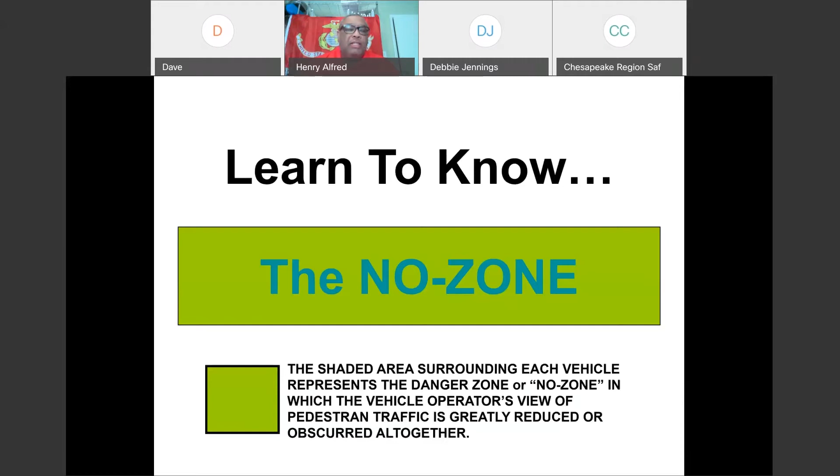Semper Fi, David. Thank you so much. First and foremost, let me just thank Dave and the quality staff that he has there at the Chesapeake Region Safety Council. I have been going there and have met many friends in class as well as the staff there. They're A1 and just can't beat it. So thank you so much for this opportunity.

Good morning, everyone. This is new. It's new for myself. I have taught many classes along with my staff, and this new way of teaching just shows you how quick we can adapt.

So to get to it, roadway work zones are hazardous for both motorists and the workers. It's a complex array of signs and barrels, and it changes for the workers as well as the traveling public every day.

I'm going to give you a few figures here. Believe it or not, pickup trucks and SUVs account for 151 worker deaths on the road as well as in construction sites. That sounds kind of strange. You'd think everybody would know what's around them, but that's not it because we get complacent. You've heard this word before because most of you are safety professionals or operators of equipment. Machinery makes up 131, automobiles 129, semi-trucks 124, and dump trucks 82.

And it's not just a construction issue, it is also a general industry warehouse issue, working in and outside of buildings. So you would think it's not so dangerous, but it very well is.

Today we're going to do something different. We always talk about knowing your safe zones, knowing your escape routes. We also talk about the equipment inside the zone. But do we talk about it from an operator's perspective? I always tell people, remember one thing, the operator is not looking for you. So you need to look out for him. You need to know where you are, and what the possibilities are.

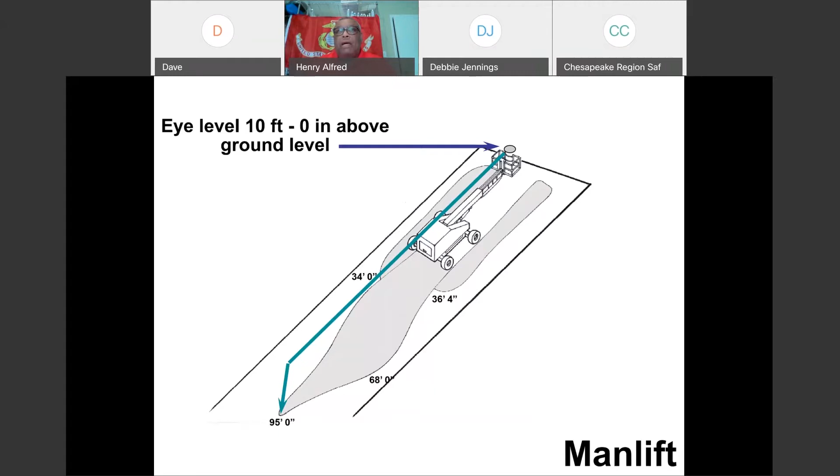If there's a wall, barrier wall, guardrail, whatever on either side of this piece of equipment, it could accidentally tilt over. They don't see you, you're in the way, something happens. I got a couple of examples that we'll go across here pretty soon.

We had an incident some years ago where a guy was in the way, had his back turned, and the operator didn't see him. When he swung around with the piece of equipment, it hit him and injured the man. So you have to be aware of the surroundings.

You can't be standing beside this piece of equipment, because you don't know what's going on with the chains. He may accidentally have a swinging piece of equipment that actually moves, and you get trapped under the wheels or whatnot.

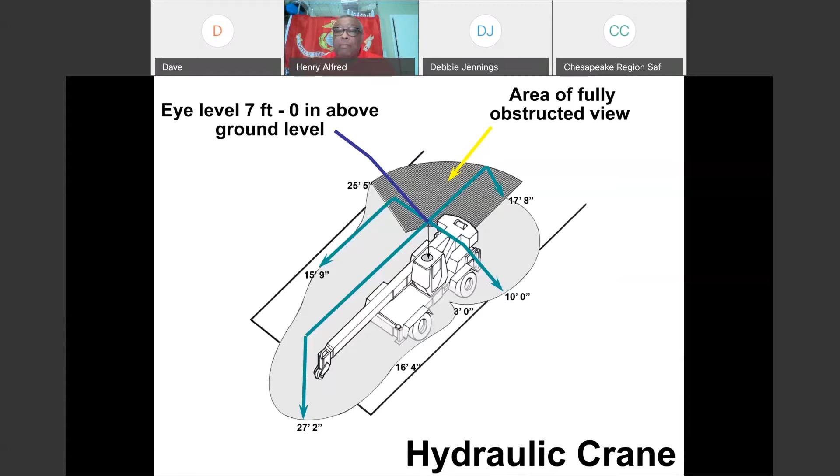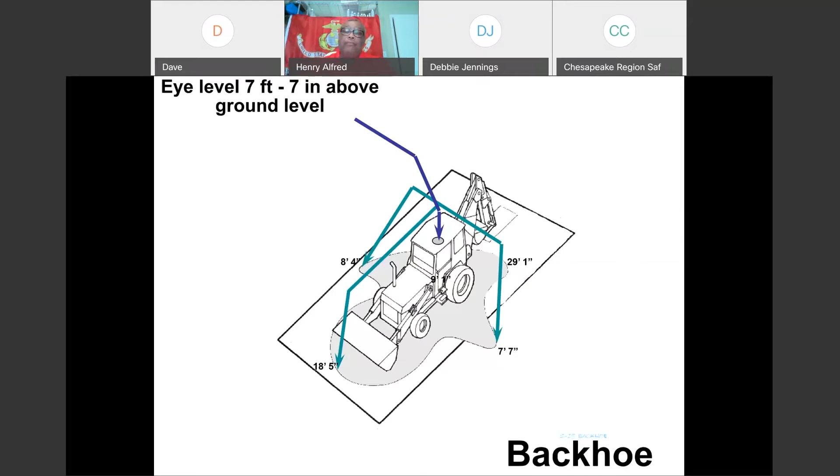It's a tragedy. We had a young man working for us during the summer one year. We were driving down 695 pretty early in the morning. We look over, what do we see? We see a worker laying on top of the track of a piece of equipment. I can't make this up, ladies and gentlemen. I cannot make this up. He was laying on the tracks of the equipment. Of course, we had to get off at the next exit, come back down, and immediately get into the work zone. Fortunately, we got there before anybody started anything or moved anything. And there he was, asleep on the tracks of this piece of equipment. How many of you would even believe this story if I told you and didn't know me? But I can't make it up, I couldn't even think of something like that.

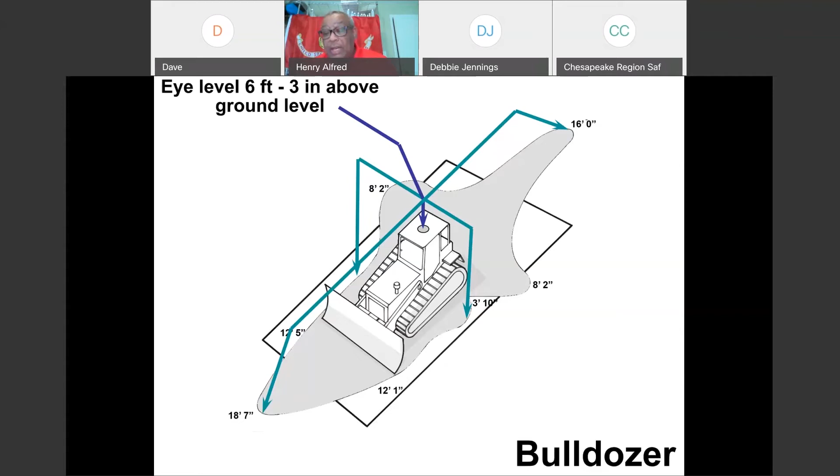And that's inside here, of course, the noise. Again, he is focused in on doing what he's doing. These operators have a lot of responsibility of grading. Sometimes you'll see them on the side of a hill going up and down, and what they're trying to do, that's an environmental thing. So they have to be focused in on what they're doing so they don't turn that piece of equipment over.

And when you think of stuff like that, you're like, when you're focused in on what you're doing, what do we call it? Having blinders on. We do a lot of that. I mean, even 30 years in this business, doing what I'm doing, every now and then I have to be reminded to take my blinders off. I'm no different than anybody else.

I'm human. I come to work, I have different emotional days. I try not to have bad days, but sometimes something's weighing heavily on my mind, and I'm just not in the zone. And then I walk out there and I'm focused in on something else other than the task at hand.

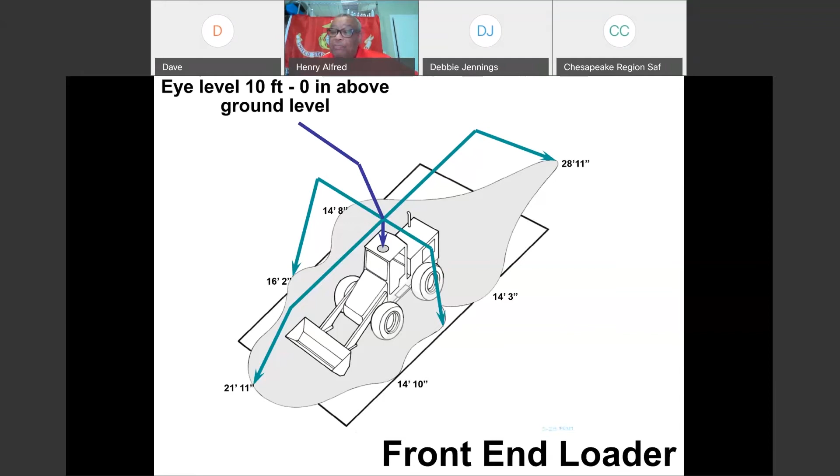Remember that. A lot of people take that for granted. But I'm telling you, I've seen enough of it, and I can sit here and talk all day about it. It doesn't take but a split second to change your life and somebody else's life. Because think about this: if you're hurt or injured, how many people will it take to help you out? If in fact you have anybody at home to help you out. Those are the questions you need to ask yourself.

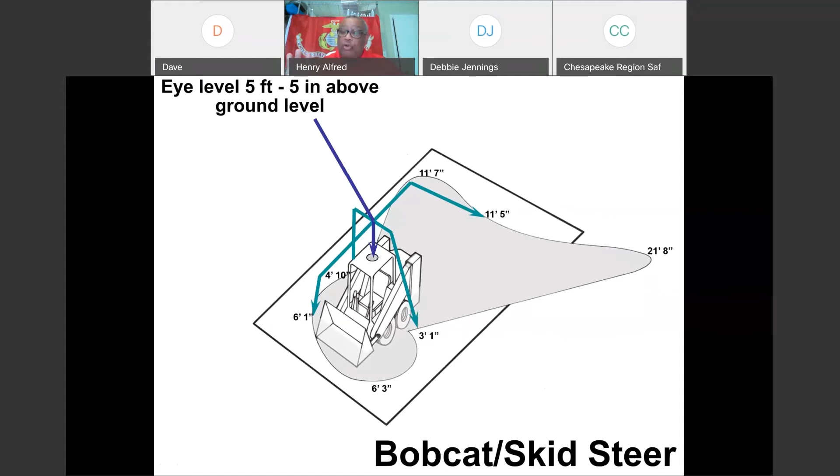High reach forklift. A lot of y'all see these on buildings and whatnot, lifting material to the roof. Operator is 7 feet off the ground. Again, look at the blind spot to the side, 85 feet. And most of the time this arm articulates up and down from the operator's right side, and he has material on the front. Now, they drive this with material on it. So now you have two hazards: the piece of equipment itself and the material on it. So you have to be careful of everything you do.

Because now the material has created a blind spot for the operator. Chances are you have some really good operators out there, and I'm not saying there are bad operators. But everybody's not thinking about what they're doing. Sometimes a guy would try to move that forklift close to the building, and the operator's trying to look at the load, where he's going to sit it, and watch you at the same time. That's a no-no. That's not going to happen because somebody's going to get hurt regardless.

But the only thing he needs to know, if he's a good operator, before he sets that down, he's going to get out of that piece of equipment and walk whatever distance it is to the place he's going to put that material.

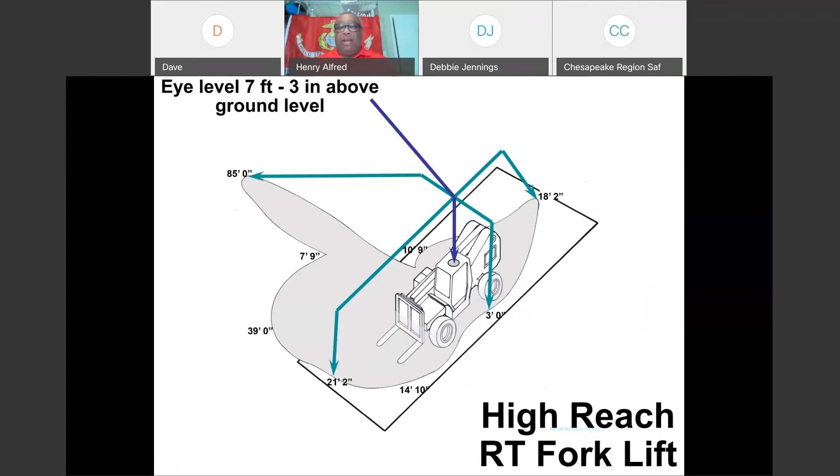Forklift, 3-ton. Look where the operator is. Those are fixed forks up and down. 8 feet doesn't seem like a lot. 5 feet doesn't seem like a lot. But when you're in that zone, it doesn't take but a split second.

We had an incident where a guy got caught between, I forget what the equipment was, but he got caught between a jersey wall. You know, jersey walls, those walls you see on the highway that you see the workers behind, those are called jersey walls. And we've had people trapped in between the equipment and those walls or another piece of equipment where they couldn't get out. They were trapped, not paying attention.

The operator 6 feet above ground. But again, this thing has these 4 wheels up front and the guide wheel in the back that turns. This again is a tight turning piece of equipment, ladies and gentlemen. I'm telling you right now, you are responsible for where you are in relationship to any piece of equipment in the work zone. And this right here, you tend to think that the small equipment is not really dangerous because you can see the big equipment. But trust me, just like that skid loader, these tight turning, small, nimble piece of equipment, okay, will catch you.

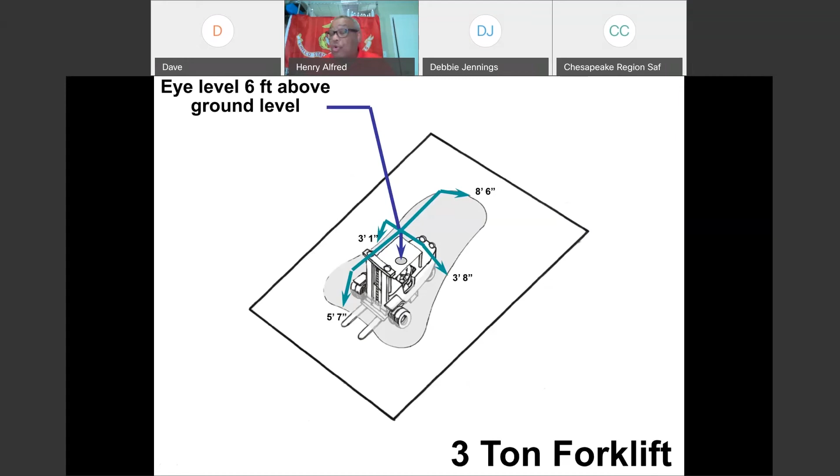Okay, 10 ton. We went from one extreme to the next. 10-ton forklift. Again, same thing as the one before, just a little bit bigger, a little bit higher off the ground.

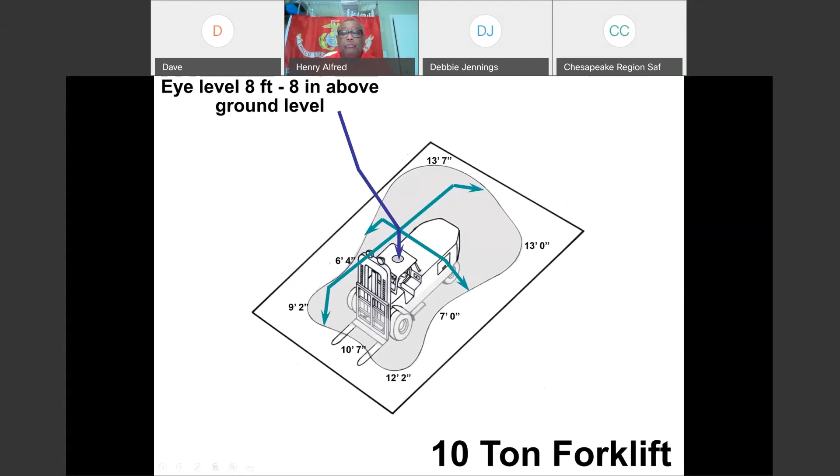17-ton forklift. We've had some of those on the job because they would lift. You'll see them every now and then with the crane helping with some of these soundproof barrier walls, or they'll hold them up so the guys can get straps on them or rebar and stuff like that. Again, you got to look at everything around you. You got to look at everything around you.

I got a phone call some years ago up by WMATA, and I had a lot of friends there at WMATA, and we had a dump truck run over a young man, an older man. And of course, I'm looking for cameras, so I called WMATA to see if their cameras were facing out, and it wasn't. And I finally found this car dealership up the road. I mean, he had this small camera, but man, was it powerful. You couldn't even tell he had a camera. And I got the video. And unfortunately, there were like 20 people out there when this man got run over by this dump truck. And it was kind of crazy how it happened.

The driver never saw him. He felt him, but he never saw him. And one of the things during my investigation, a guy came up to me and said, well, I heard the hard hat hit the ground. Yeah, you were like 8 feet away from him. The shaver, the asphalt was on, and the dump truck was running, and you're telling me you heard a hard hat hit the ground? Got better hearing than I do, because I wouldn't have been able to hear nothing. And it was unfortunate, man was killed.

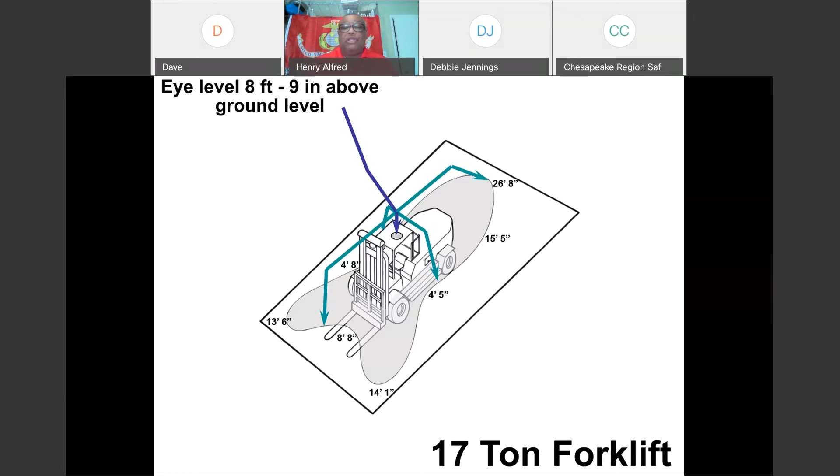You think he walked around that equipment? No. It's almost the same thing as kids in your home. How many of y'all walk around your vehicle when you're at home to make sure no children are around? Blind spots - it happens, and you as adults know it happens because you have talked about it before.

Semi-truck. What's the biggest problem with these? You see it all the time. The guy tells you, if you can't see my mirrors, I can't see you. How many of y'all seen that? Raise your hand. Oh okay, most of y'all, yeah you've seen it. Look at the obstructive view.

And what do they do? They back up into the work zone or your warehouse without any spotters. That's a no-no, especially in construction warehouses. Now when they go to a loading dock, that's different, but they still should be aware. They still should get out and walk around their vehicle to make sure nobody's around. But look at the distance we're talking about.

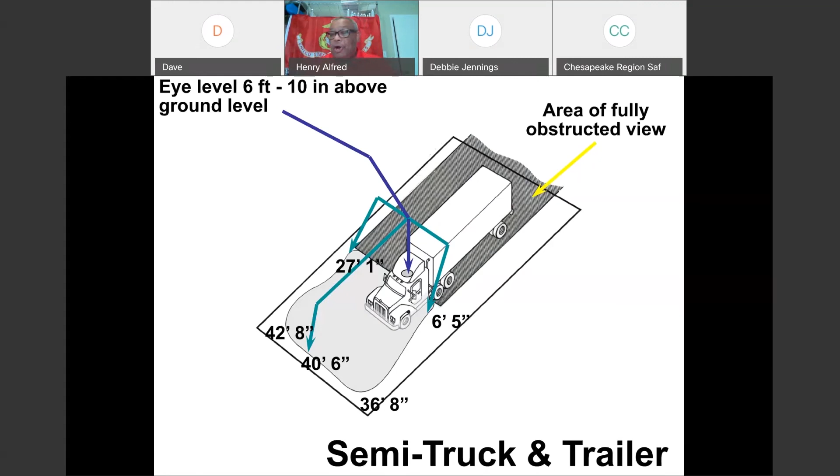You have to be smart. You have to be smart. These tractor trailers, I'm telling you, they can't see directly behind them. I've had one actually pull out of a work zone through a closed lane, and I had to get the state police to stop him. He knew that was a no-no.

Dump trucks. How many people think about dump trucks? Some of them come to your area, some of them come to your offices, places like that. So these are things you have to be aware of - again, blind spots. And some of these obstructive views will not change except with the vehicle. It will change when the vehicle changes position, but it's still an obstructed view.

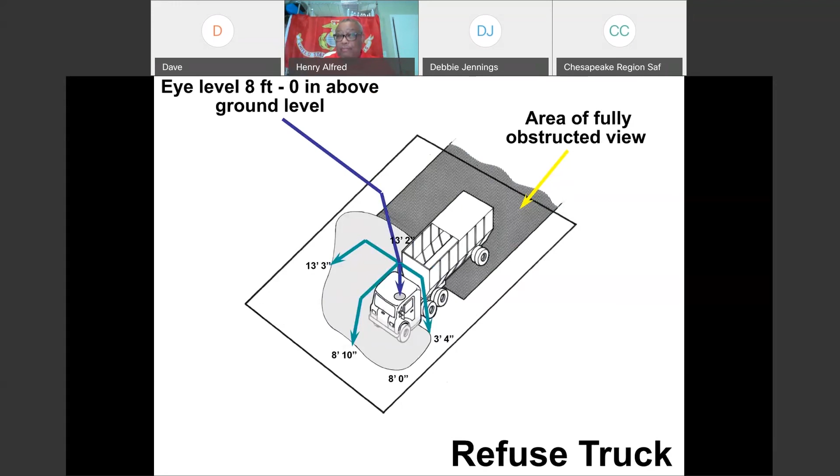High vac truck. How many of y'all dealt with high vac trucks? We deal with them a lot here, and I know WMATA has high rail vac trucks. MTA here has it where they clean the tracks and stuff. Also on construction sites, because they clean the drains. This thing is loud - if you have never heard one, it is a vacuum cleaner on steroids like you have never seen in your life. It has a water hose in the front, but again the operator's view with the hose, 100 feet of hose or whatever, is obstructed. This area behind it is a fixed, obstructed view. And he has a spout right here that comes out and can move around.

So again, ladies and gentlemen, you need to know the equipment and you need to know your avenue of escape. Because the boom for the vacuum hose right here actually articulates left and right over the cab of that truck, so it also changes the operator's view.

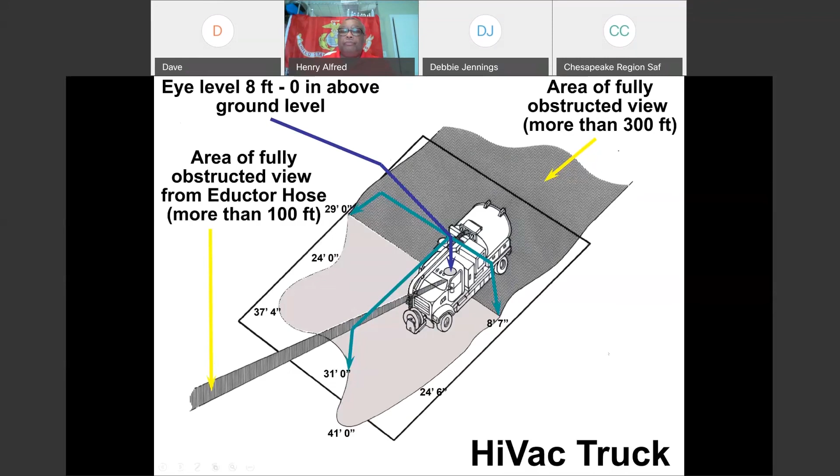5-ton dump truck. Again, I've had a guy caught underneath the rear duals of this. They lift the body up. I've had people that would have been standing on the side to take tickets or whatever, truck turns over. Again, be cautious of the equipment that you're around. At least know what its capabilities are.

What does it do? Does it swing? Does it lift? What if the parking brake is not set? What if he accidentally rolls back a few feet and you don't know it? You see the dump truck, but the thing about it is it rolls back a few feet. Operator's in it, you might push the clutch in, it might just roll back a little bit, roll forward a little bit. Where are you in relationship to it? Again, situational awareness.

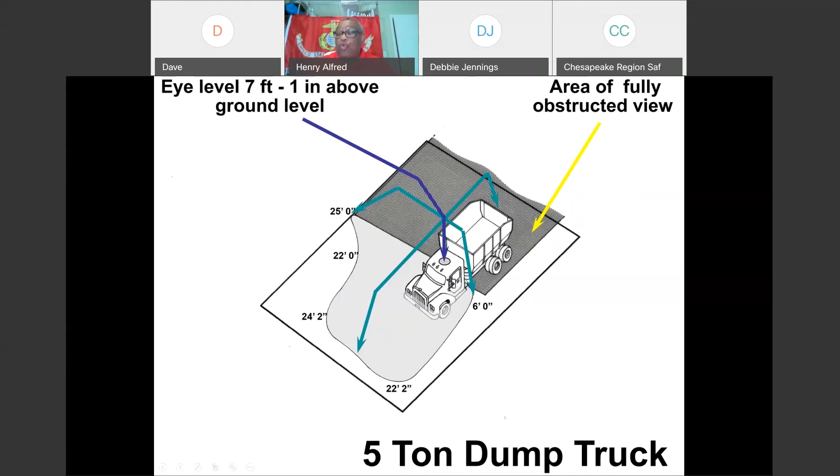A bus. Now we don't use buses a lot, but some construction crews have gang buses where they bring all the workers to work on a bus. They go park somewhere else and drive to the work site. So again, people get underneath the shaded area of the bus or put stuff behind it. School buses, okay? Again.

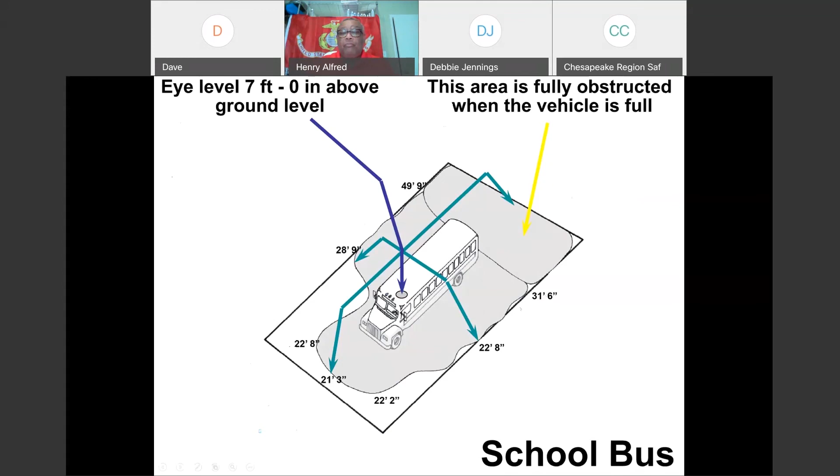Now, street sweeper. You probably say to yourself, say, Henry, street sweeper. Two people were killed by a street sweeper in D.C.

I did the investigation for one of the construction crews in D.C. They called me to come help them out because they didn't have any safety people. The legal ramifications behind it were going to be ugly for them anyway, but they just wanted to know, to make sure. A lady got caught up in this thing. The operator didn't see her, and why she didn't see this thing, I'll never know.

Again, what did I say? What is the street sweeper doing? They have steering wheels on both sides of these things, but what is he doing? He's looking out the window to make sure he stays to the edge of the curb so he can clean the edge of the curb. He's not looking for you. I'm telling you that right now. There's no way he's looking for you.

If you've got your iPod, your earbuds, or whatever they call it, in your ears and you're not paying attention, how many times have you watched videos and laughed at people walking into a water fountain, walking into a pole? It ain't a mistake. If they didn't have those things in their ears and they left that phone in their pocket every now and then, they'd be okay. Yeah, I hate to say it, but this new technology is great, but it also comes with a cost.

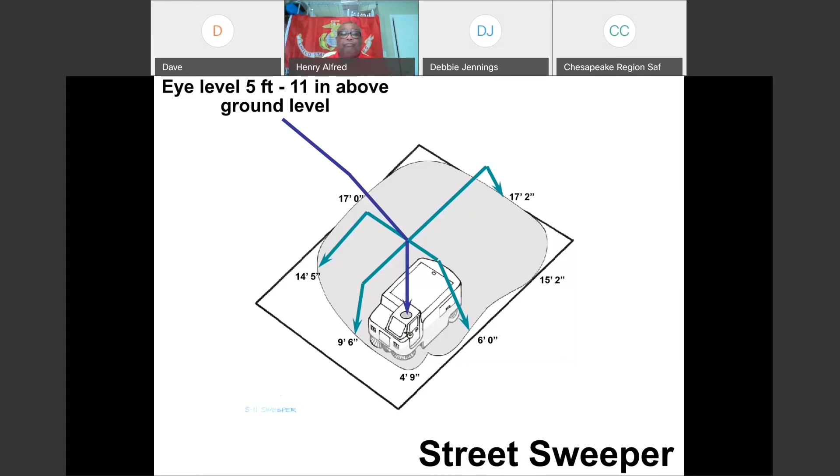This is a straddle lift truck. Now, this lift stuff underneath, some of you may have never seen one, but we also have a machine similar to this that actually lays concrete to make a barrier wall. If you get caught between that and the rebar, I'm telling you right now, it's going to be ugly. Even if you survive, it's going to be ugly, because now we've got to get you out of this thing. And once it's already grabbed you, there ain't much we can do but try to get the rest of what's left out. That's how that goes.

So I'm just letting you know, this right here is a terrible piece of equipment because there are blind spots underneath, around, inside. It's just a terrible machine to be around, and you definitely have to be very careful around it.